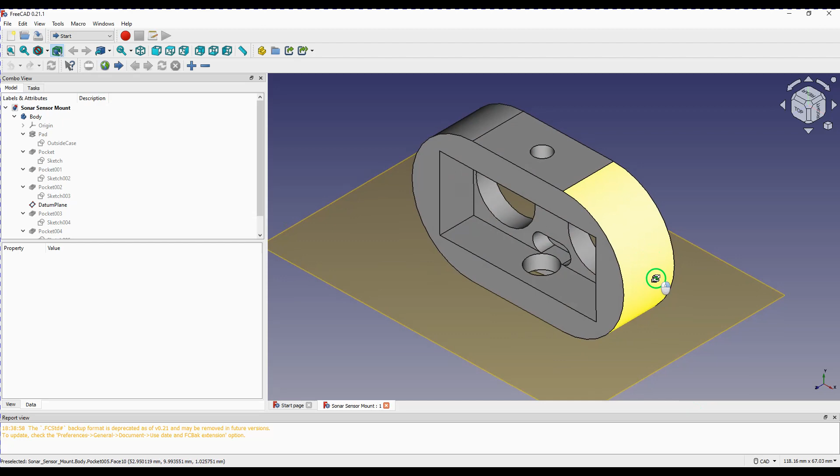So in here is where our sonar unit will eventually live. It's got provision for the wires to it, the back end of the connector to go poke through, and also a spot for the crystal oscillator that's on the board to poke through. These two holes are big enough for the two sonar sensors, the transmit and receive, to go through.

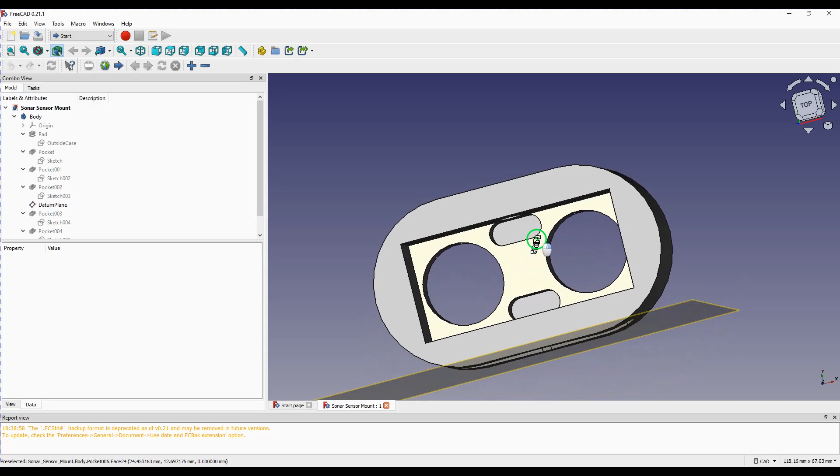But more importantly, on the bottom I have provision for a servo horn to be attached in there. And once I've got the servo horn in there, I will drill through with a small drill, probably 1.8 mil, maybe a little bit bigger, a little bit smaller even, and then use a very small screw to go through the horn and secure it back into this piece.

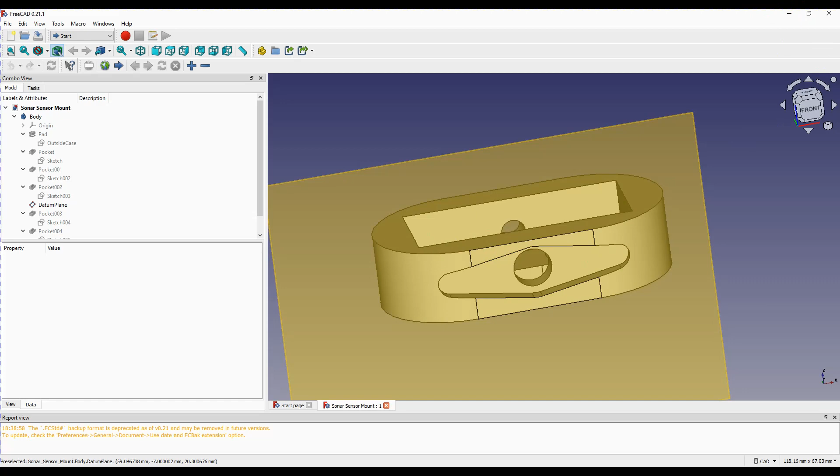The other piece that I need, I created this part as well in FreeCAD, and this fits on top of the MR4 tank in the space that was left after our Arduino Uno was mounted. And there's provision in the top here for a standard size servo to fit. I'll be using a JX Servo 5521MG 180 degrees digital servo, and that will fit in there quite nicely.

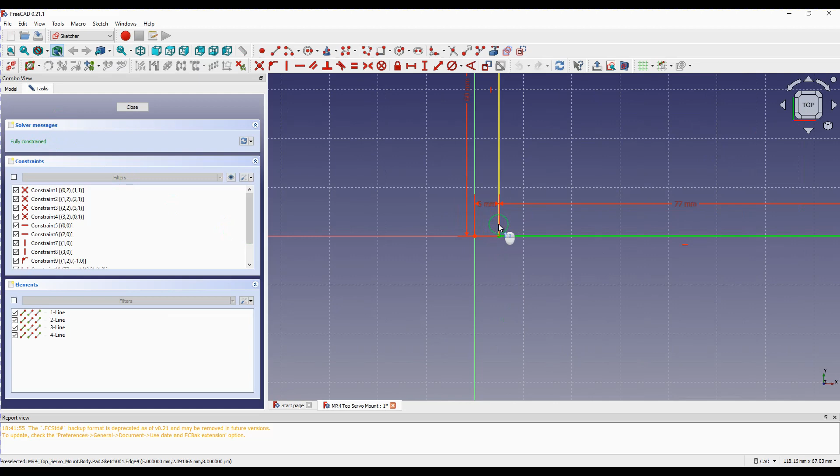I've also added this hole here for the wires from the sonar sensor, or the ultrasonic sensor, to go through and into the bottom of the robot. In order to make this, what I first did was create a sketch. We zoom out a little bit. So the sketch was basically just a rectangle, which I then extruded, or padded as FreeCAD calls it. I then created another sketch, which are two parallel rectangles, which are then padded out, and that's these parts here.

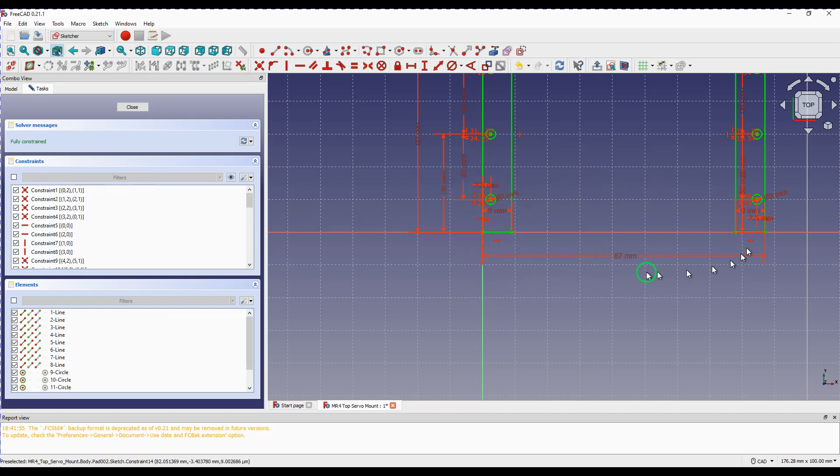Then I created a pocket. Actually, no, I created another pad. That'll be the two flat plates. I did have to modify these a little bit down the track. I made them a bit too thick when I first created them. I padded that out as well, and this allowed all those parts to join together into one big part.

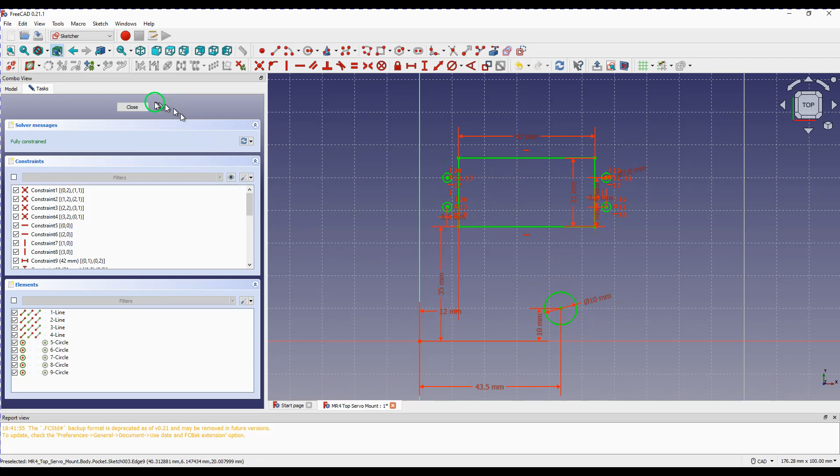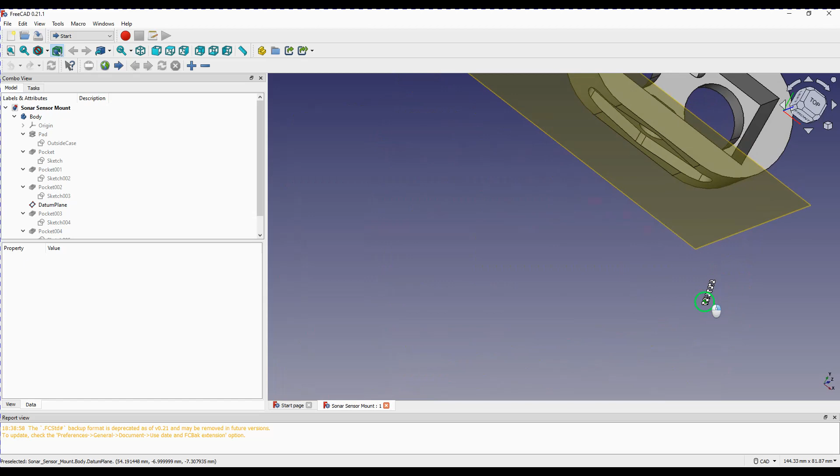I then created a sketch that had the size of the servo hole, plus the holes for mounting it, and that hole for the wires to go through, and I used a pocket function to cut that out of this frame that I'd built. I then exported that as an STL, and I printed that using my resin printer, along with this one, which after I printed it out, let's just get to the top.

And I also put a hole through the top here as well. So this is a hole here to get to the screw on the servo horn to secure it down to the servo. And this one here is a hole for a screwdriver to go through. So you'll see how I'd use that when we get to the video side of it.

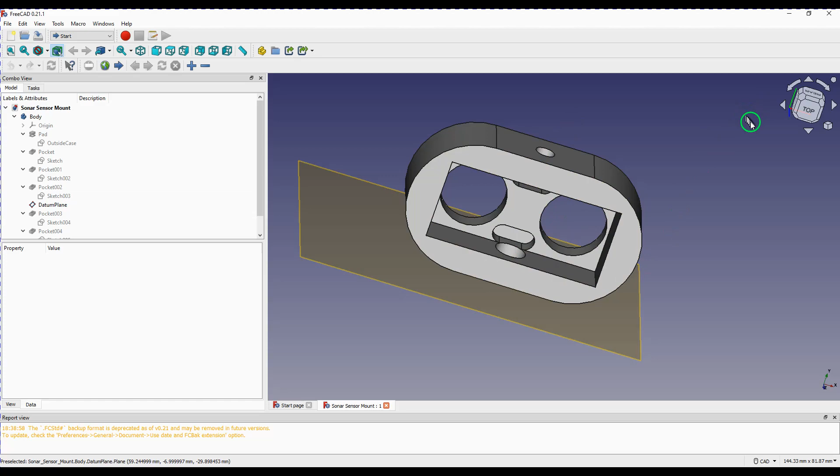Okay, so now that I've printed them, these are the two parts that I've created. So this will clip into the top of the robot, and it's got the same three holes in it as the mount for the Arduino Uno has, and that'll screw down to the body of the robot so it doesn't move. But before we do that, let's mount our servo in.

So these screws are a 4G 6mm long screw designed for sheet metal. They seem to do a reasonable job holding this servo into this resin material that I printed in. Now you can print that in any sort of plastic that you like, PLA, ABS, PETG, etc. I chose to do resin because I've actually started to become a fan of the resin printer, and I've been printing a lot more in resin.

I've been using the Anycubic tough resin. It's a little more expensive than your basic resin, but it does take an impact a hell of a lot better than your basic resins do. I also found that it comes in clear, which I found was really good. So that's our servo mounted, that's nice and easy.

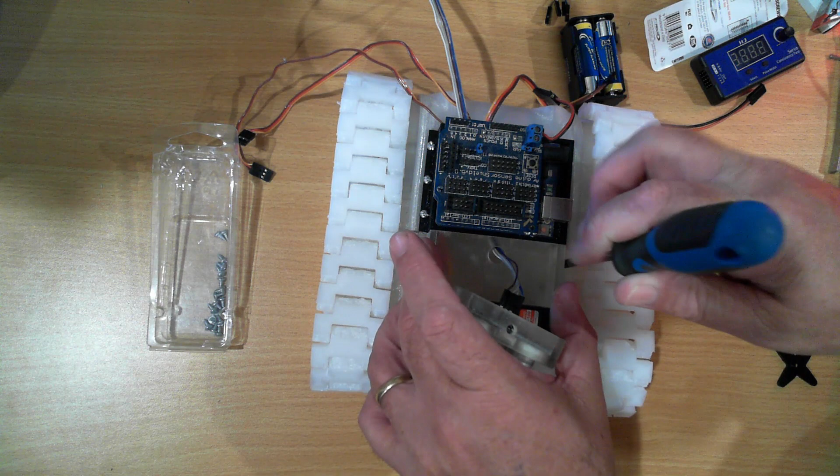And to hold that down, we'll just use some more of these screws. Again, you don't want to over tighten these. You're only going into very weak plastic. That'll do for that.

Okay, so on our Arduino, I'm going to connect these up to ground, 5 volt. And I will put the grey, which is our trigger, on 7, and the white wire on 6.

This is our wire from the servo. I'm going to plug that on to 8, and I will connect these two eventually up to 9 and 10, or 10 and 11. It really doesn't matter, but I'm not going to do it just yet because I want to get the bit of program for this working first. So I'll do that in the next video.